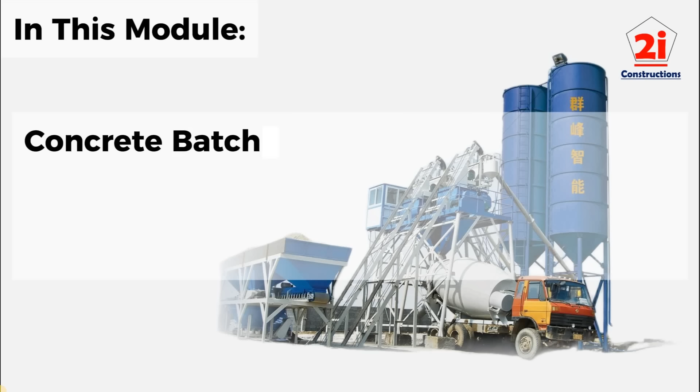Welcome back to 2i Constructions and to Module 6 of our course, How to Become an Effective Batching Plant Quality Control Professional. In this module, we'll explore one of the most important topics for any QC engineer or plant supervisor: the concrete batching plant approval process as per Saudi Aramco Engineering Procedure SAEP-383.

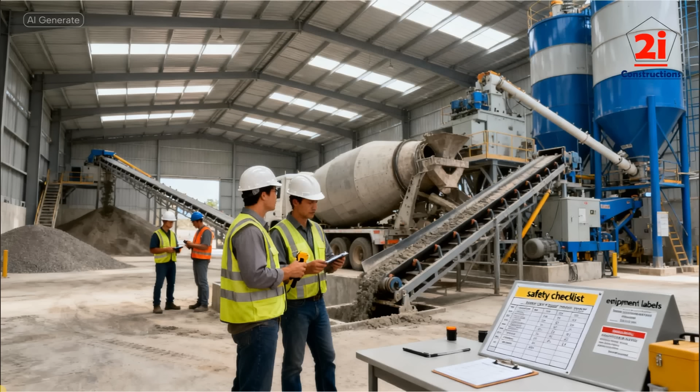Before we go into the process, let's first understand, what does batching plant approval actually mean? Batching plant approval is the formal process through which Saudi Aramco verifies and qualifies a concrete batching plant, ensuring that the plant, its equipment, personnel, materials, and documentation all meet Aramco's strict quality and safety requirements. Once a plant passes the qualification process, it is listed in the Saudi Aramco approved batch plant list, allowing it to produce and supply concrete for Aramco projects.

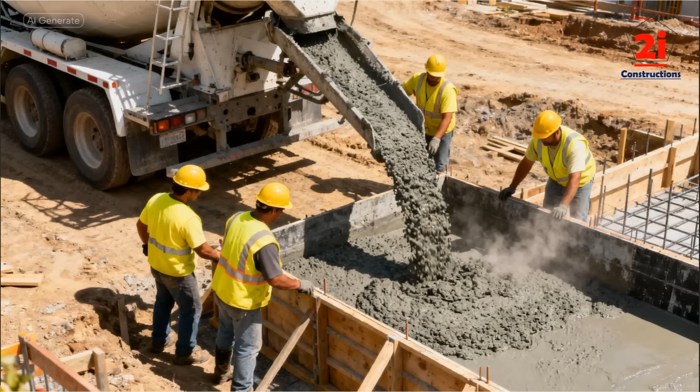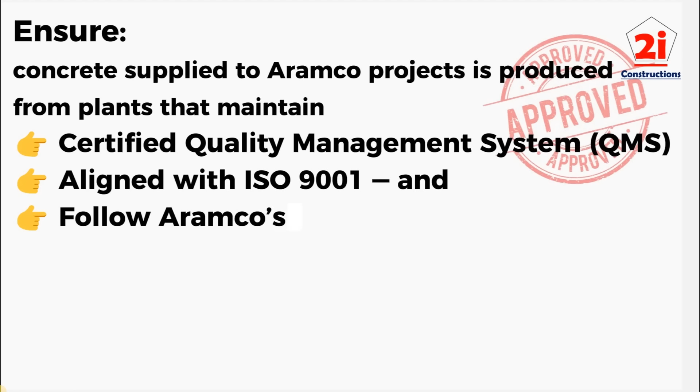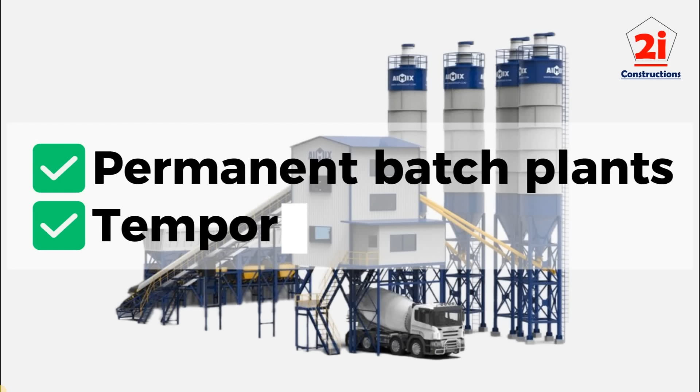This approval guarantees that the concrete produced is consistent, traceable, and fully compliant with ASTM, ACI, SASO, and Aramco standards. The purpose of this approval is to ensure that all concrete supplied to Aramco projects is produced from plants that maintain a certified quality management system (QMS), typically aligned with ISO 9001, and follow Aramco's operational, testing, and documentation requirements. The process applies to both permanent batch plants, commercial or central plants, and temporary or project-based batch plants located at construction sites.

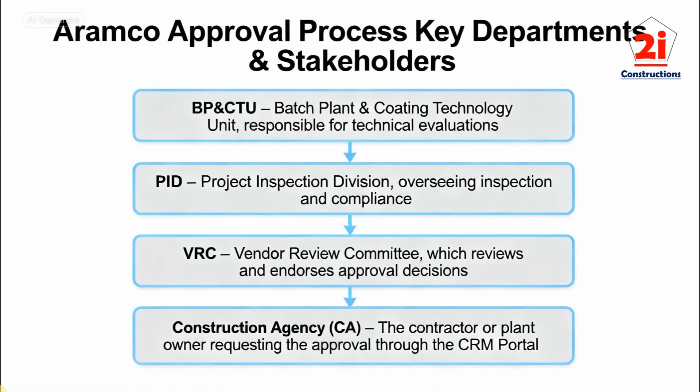The approval process involves several key Aramco departments and stakeholders. BP and CTU, Batch Plant and Coating Technology Unit, responsible for technical evaluations. PID, Project Inspection Division, overseeing inspection and compliance. VRC, Vendor Review Committee, which reviews and endorses approval decisions. Construction Agency (CA), the contractor or plant owner requesting the approval through the CRM portal.

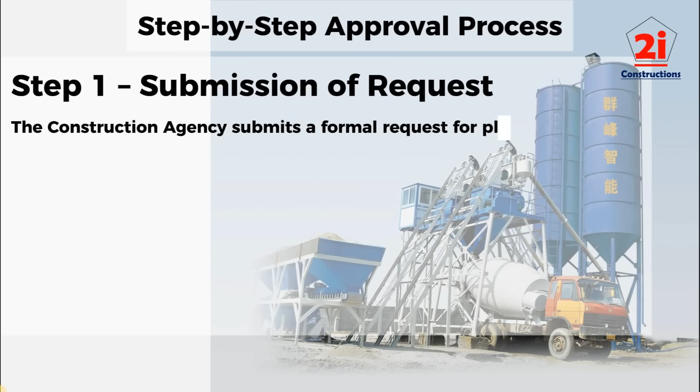Step 3. Initial plant survey. A detailed technical and quality inspection is carried out. Inspectors evaluate equipment calibration, storage and handling of materials, laboratory setup, documentation and records, personnel competence and certifications. Step 4. Review by Vendor Review Committee (VRC). The inspection findings and recommendations are reviewed by the VRC, which makes the final decision to approve, conditionally approve, or reject the plant.

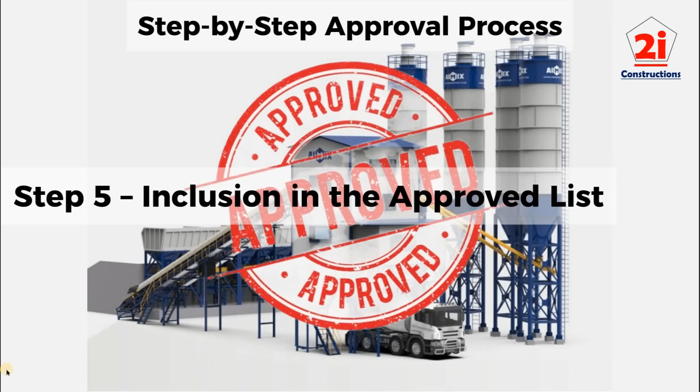Step 5. Inclusion in the approved list. Once approved, the plant is officially added to the Saudi Aramco approved concrete batch plant list, granting permission to supply concrete for Aramco projects. Approval doesn't end with certification. It continues through ongoing monitoring and reassessment.

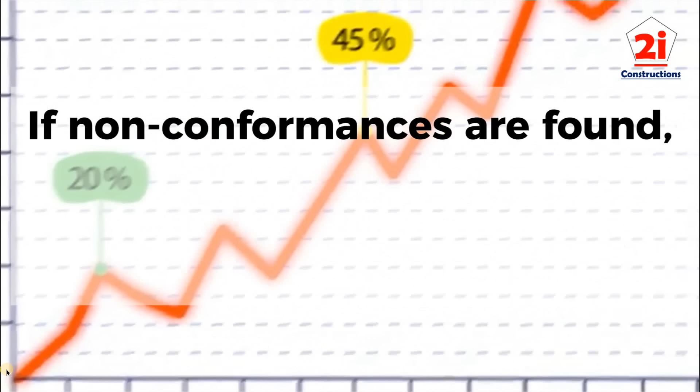The plant's performance is monitored monthly and quarterly through reports and KPI evaluations. A full reassessment is required every 5 years or sooner if performance issues arise. If nonconformances are found, a corrective action report (CAR) must be submitted and verified. Plants that repeatedly fail to comply may face suspension or removal from the approved list.

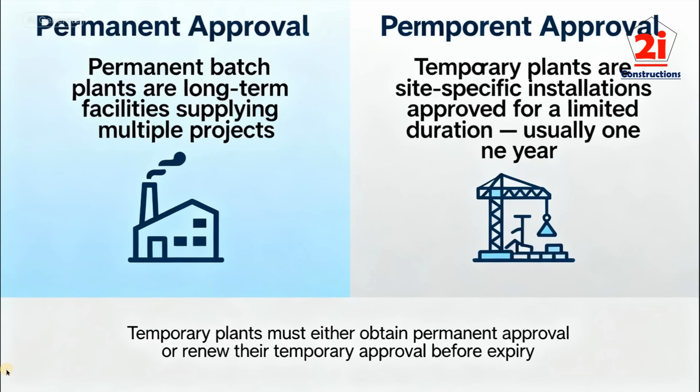Let's differentiate temporary versus permanent approval. Permanent batch plants are long-term facilities supplying multiple projects, while temporary plants are site-specific installations approved for a limited duration, usually 1 year. Temporary plants must either obtain permanent approval or renew their temporary approval before expiry.

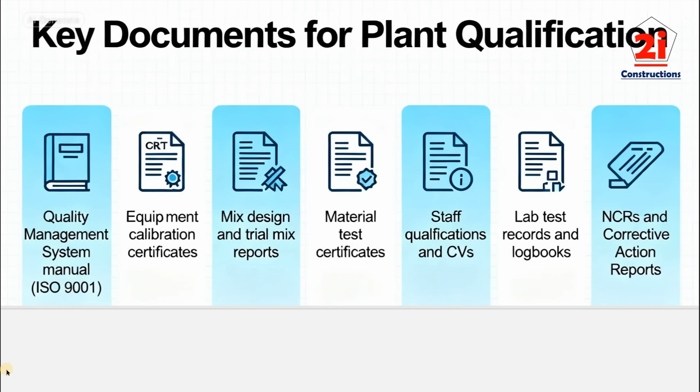For a plant to qualify, the following key documents are typically required: Quality Management System Manual ISO 9001, Equipment Calibration Certificates, Mix Design and Trial Mix Reports, Material Test Certificates, Staff Qualifications and CV, Lab Test Records and Logbooks, and NCRs and Corrective Action Reports. Proper documentation supports transparency and ensures a smooth approval process.

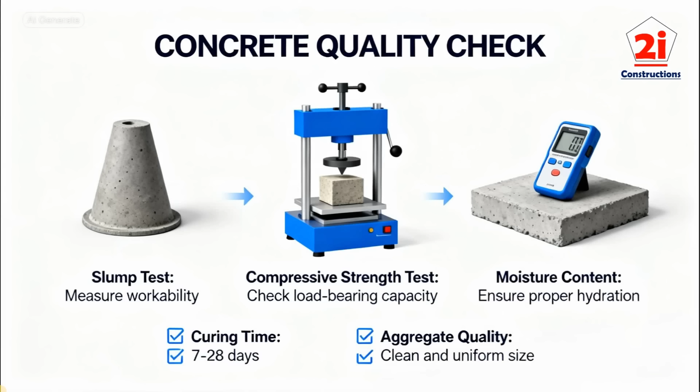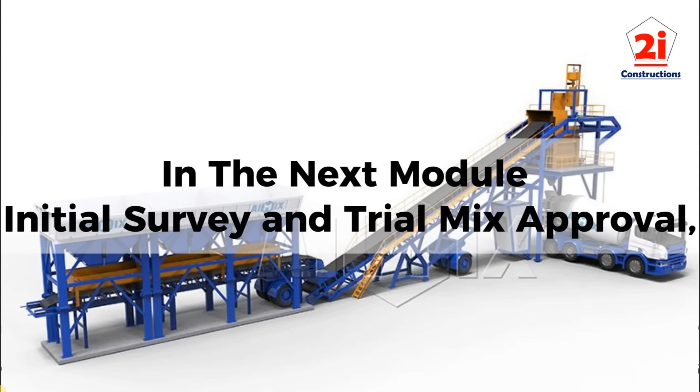To summarize, batching plant approval is the official verification process that ensures your plant produces high-quality, standard-compliant concrete for Saudi Aramco projects. It covers every aspect, from documentation and technical inspection to monitoring and reassessment, ensuring that only qualified plants deliver concrete to Aramco sites. In the next module, we'll cover initial survey and trial mix approval, explaining how to prepare your plant for inspection and qualify your concrete mix for production.